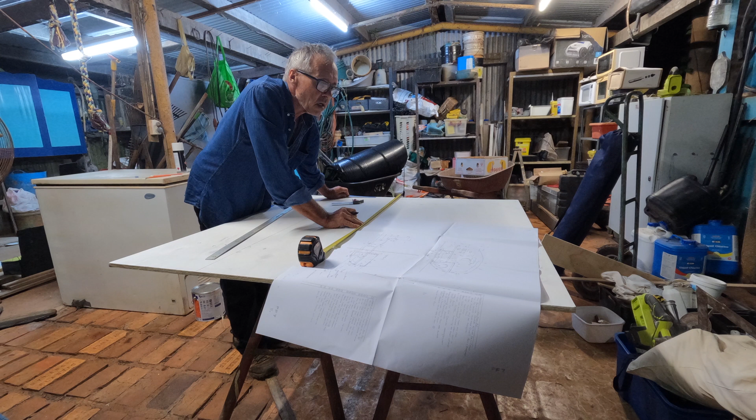We've recently sold our catamaran and now this is our next chapter in life. Downsizing to a smaller dinghy. It's a John Welsford design. It's called the Pathfinder. It's 17 feet 4 inches long, or 5.2 meters.

So we're going to build this a little bit differently, a few different techniques, and we're going to be using some different materials rather than timber. Now I know there's a few traditionalists out there, they're going to sort of curl their toes at this, but I'm hoping it's going to be a quicker way to build a dinghy, and maybe for someone who hasn't got the woodworking skills to work with timber.

The material we're going to be using is PVC foam core, an 80 kilo density, and it's going to be 10 mil thick. And we'll be covering that with some carbon fibre and some epoxy resin. So hopefully we should end up with a pretty light boat. John's designed weight for this boat is around 220 kilos. I'll show you a picture.

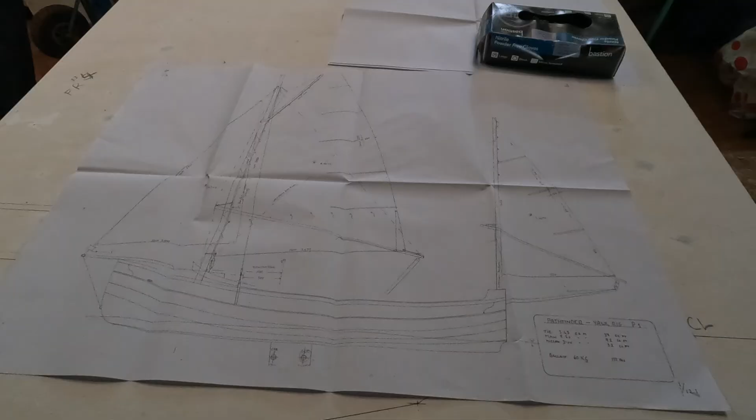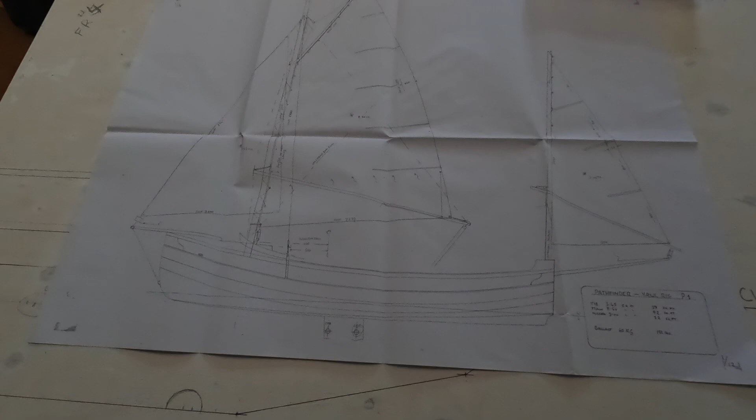So I don't know if you can see the drawing here. It's pretty light, but it's a little gaff yawl. Now, it's supposed to be a very seaworthy boat. We're going to take it on some little journeys later on. Go for some little adventures, more up rivers and lakes, but maybe we might do a little bit of coastal stuff.

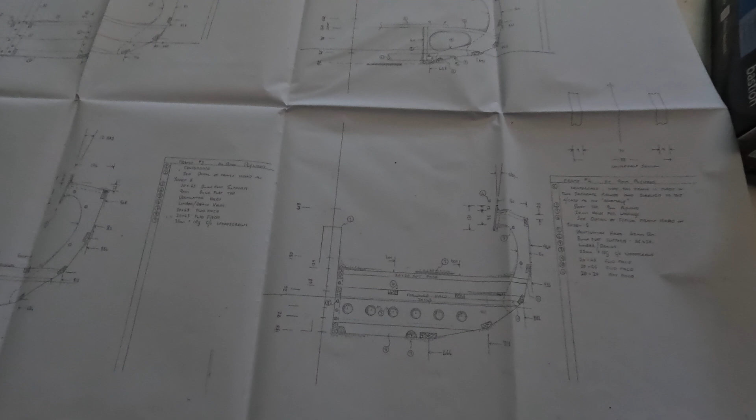So the technique I'm going to use, I'm going to build a female mould. So instead of using the traditional way of how John's done it, is set the bottom plank up on this dinghy, then they've used these drawings to make the frames, and then they stick the frames on the bottom plank and then attach all the stringers, and that'll give the shape for the planking to go on.

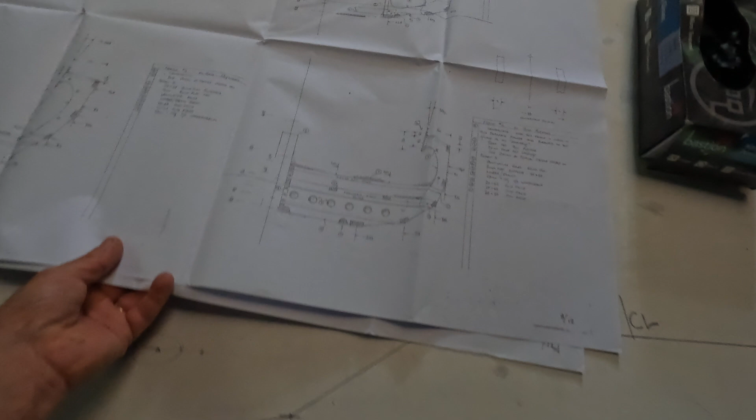So what I'm going to do is I'm going to mark these drawings out onto a piece of plywood. I've already done this frame. This is frame number 4. And I'm going to cut this out. I'm going to get the cutouts from the frames.

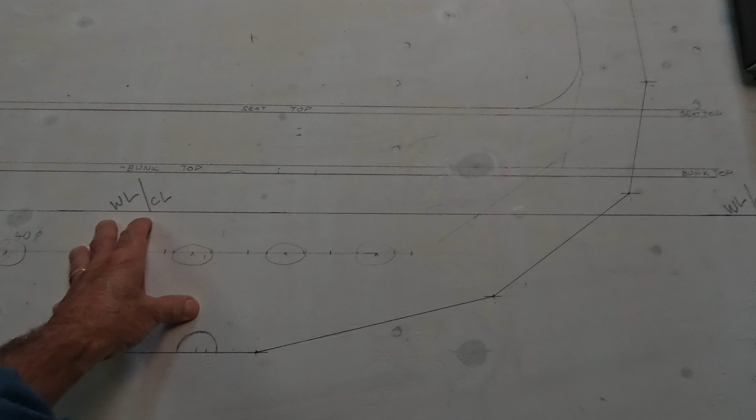I'll use these cutouts for the patterns for the frames, and what I've got left over I'll stand up on a strong back. So I'll have a series of stations. I think there's about eight of these frames to make. So I'll have 8 stations, and I'm going to stand them up on a strong back

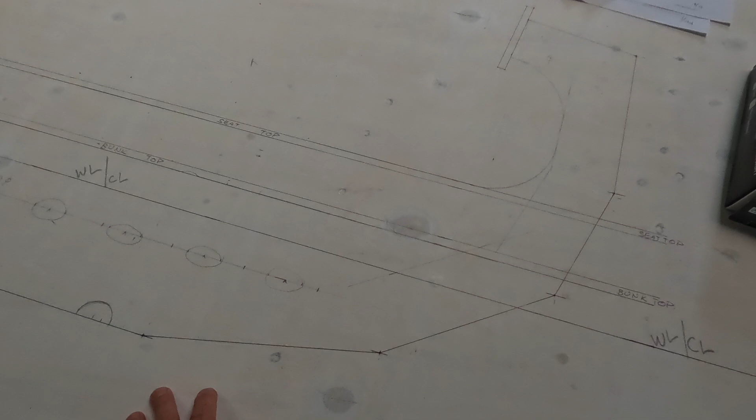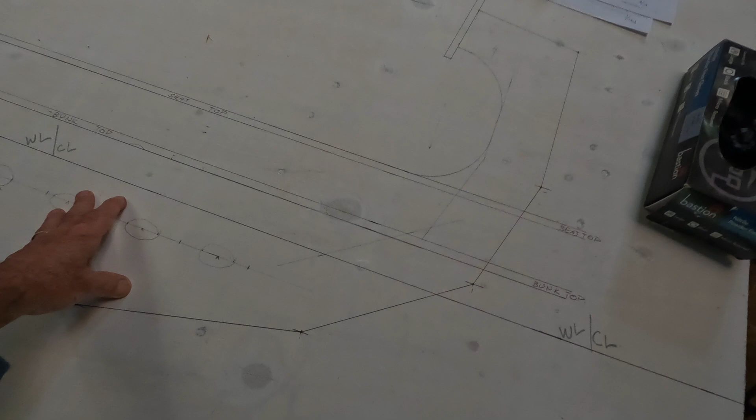and put some battens along on the chines and in between, and then I'm going to push the foam into that and glass it, and then put the frames in and fiberglass those in and build half of a boat.

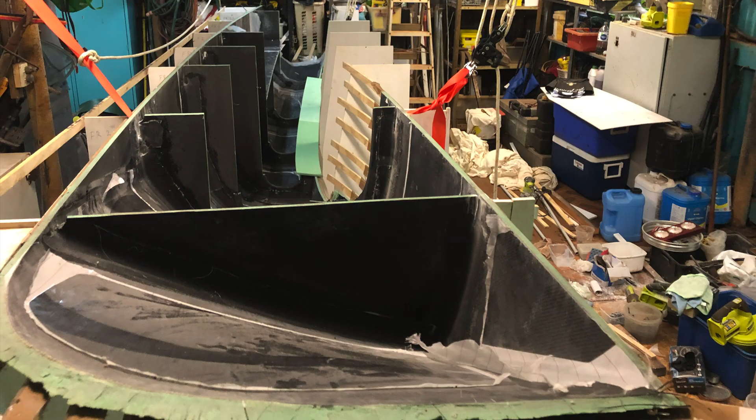So I'm building the dinghy on the center line, so the mold will sort of have the shape of half the boat formed up, and then I'll make one half, I'll disassemble the mold, I'll turn these stations around, and then I'll reassemble it with all the battens back in place, and that should give me the other mirror image of the other hull.

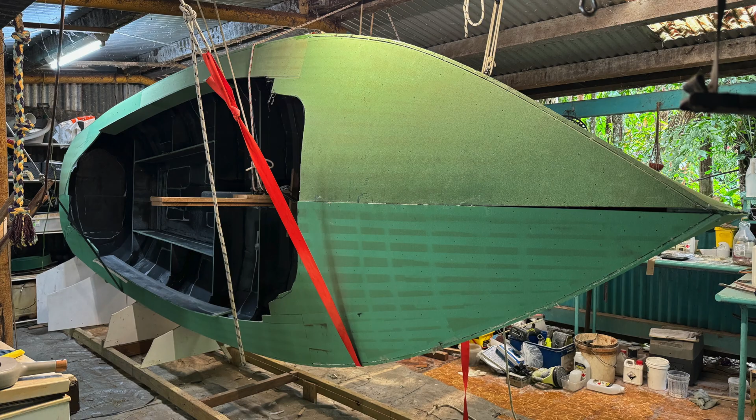And then I'll leave the second half in the mold, and then the first half that I have finished, I will lay that on top and join them together. So you'll see that as I move along and explain it a little bit more in detail.

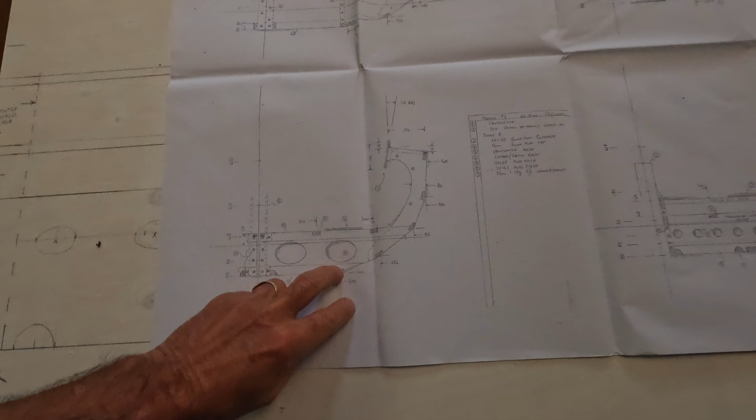So I'm going to mark the rest of these frames out, just using his measurements that he's got here, and I'll allow a thickness also for the battens and the hull skin, which the hull skin will be the foam core. It'll be 10mm thick, and then I think I'm going to use 1/2 inch thick battens, maybe 30mm wide. I'll see how it goes.

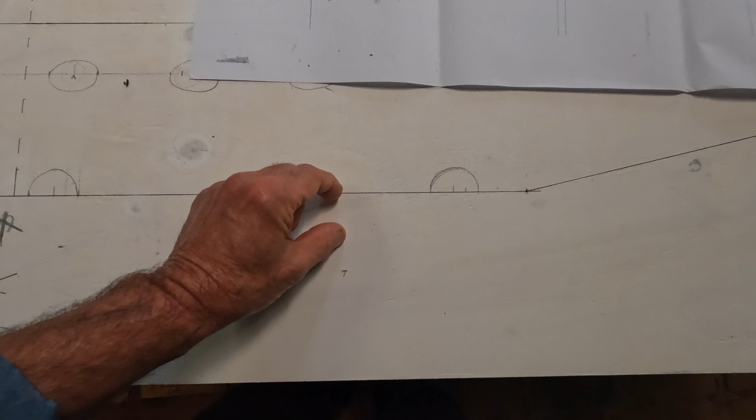So I've traced out this frame, and then I'm going to mark out the thickness of the extra line, and I'm going to cut back on that. So I'll cut on this line for my templates for the frames, and then I'll cut on this second line I'll put in, and that will be the allowance for the hull skin and the battens.

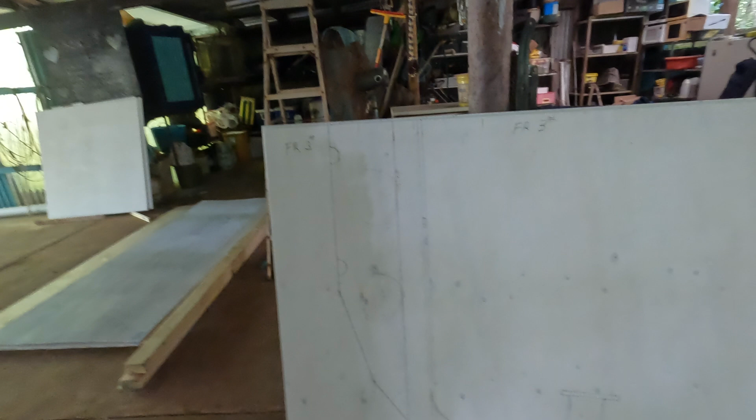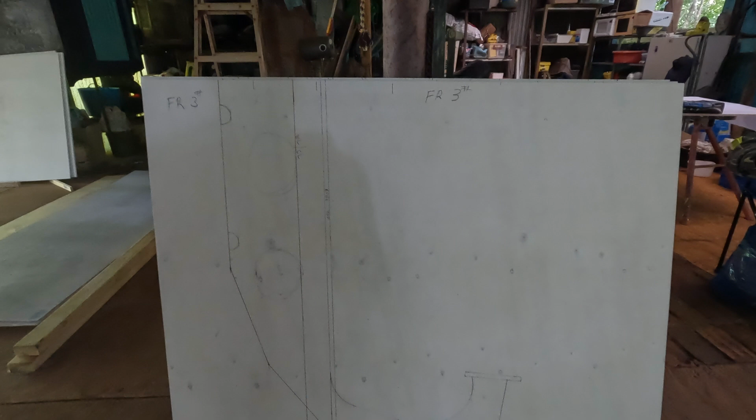Also marked out a few more here, so I don't know if you can see this. I'm trying to work the camera so I can get the screen back. Oh, here we go. So I don't know if you can see these drawings, they're a little bit light against the white, but there's some more boards that I've marked out here. I've got frame number 3, number 2, that's marked out, and frame number 1.

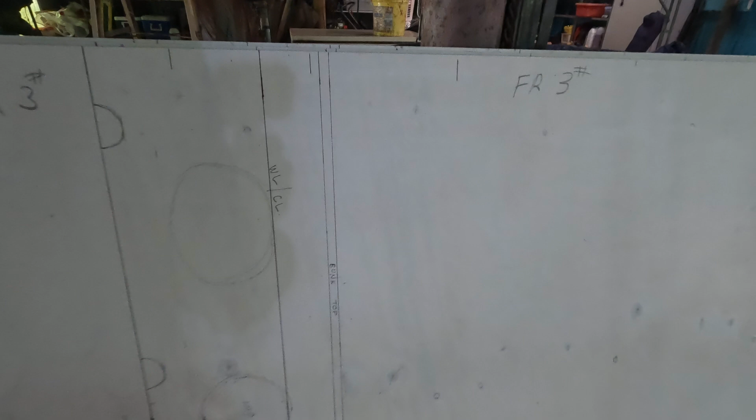Yeah, so I'm just going to finish all these off. Finish marking them off, cut them out, and then we'll take it from there. I hope you find this interesting.

I'll try and do the best I can with my movies. This is the first time I've done something like this.

So next I'll cut these out with the jigsaw, and in the next video we'll put the strong back together and assemble the stations to form the mould.